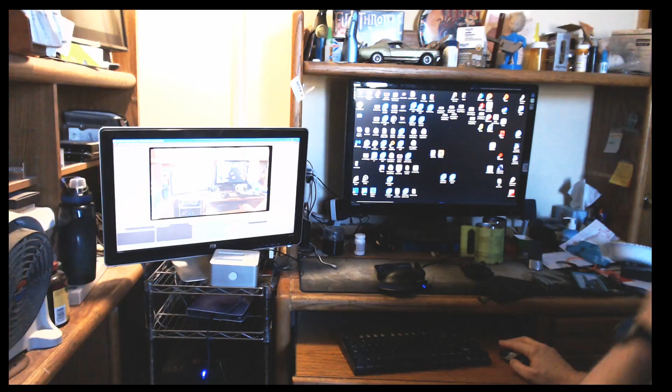So let's pop over to Fusion and get this thing finished and printed. Here's where we left off last time. This is our final, almost, piece. All we have to do is put our last little embellishments on it.

I want a hole, in fact two holes here. The first hole is just kind of a save-some-filament type of hole, and the second is going to be a hole right through here in case we want to put a piece of paracord on it and hang it. Those are both features of the original one, the green one I'm drinking my coffee out of, designed by Commando Design, on Thingiverse.

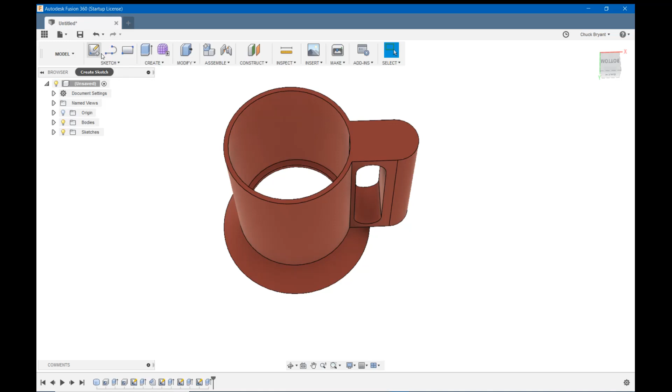So let's get that done. We're going to create a sketch on this top surface here. First, let's put our line in so we can center our holes. We'll hit L for line and draw a line down here. I don't care what length it is, just that it's 0 degrees.

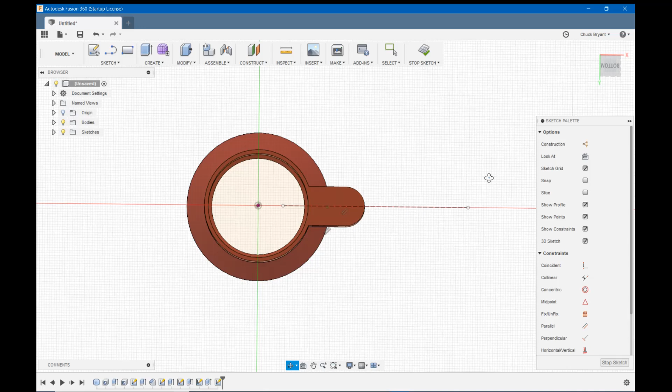I'll click to set it in place, hit escape to get rid of my line tool, then click it to highlight it. I'll click coincident over here in my constraints and lock it into the center. Now I'll click it again to highlight it and click construction. Now it turns into a dotted line, meaning it's just there to help me draw things, not part of our geometry or creation.

So we'll hit C for circle and put our circle down here. C gives you a center diameter circle. Putting it on my line, you'll see it will lock in. I think I want this hole to be 12 millimeters. Enter, enter. Now you'll notice I can move it around, but I can't come off of that line with it, only back and forth.

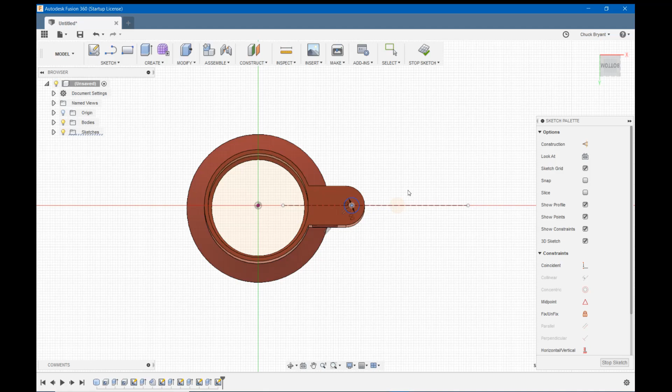I'm going to put it, I don't know, about there. I could dimension it, to be honest, but I don't care enough. I'm sorry, I shouldn't say that, but I don't. I only care about where it is, not exactly.

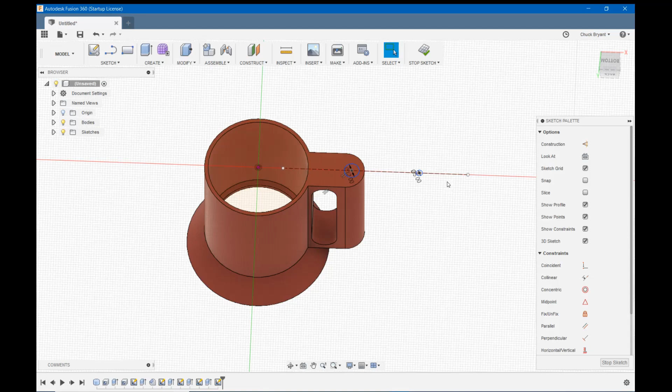So I'm going to make another circle, lock it in here. This one wants to be 5 millimeters, I'm just throwing numbers out here. Let's zoom in and move this. I want to put this circle almost directly over the center of our arch - yeah, that's pretty darn close. I'm happy with those, not going to get any fancier than that.

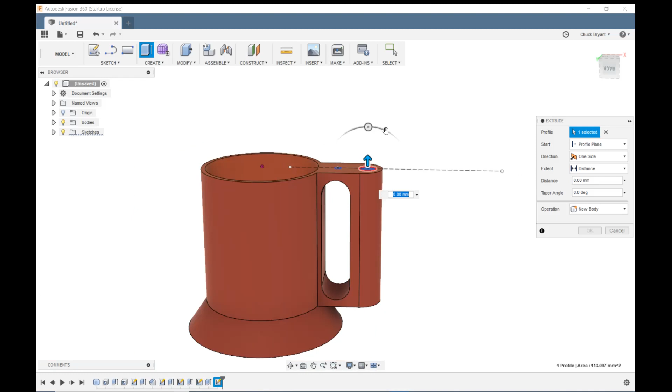So I'm going to hit E to extrude. I'll click on this one, and this one's going to go all the way. I'll just drag it down about there and say okay, it's going to be a cut. I could tell it to go all the way - if I change distance to all, I could change this dimension up and down and that hole would always go all the way through. If I told it an exact dimension and then changed this, I'd have a hole that didn't go all the way through. But I'm not going to change this, so I just drag it down and say okay.

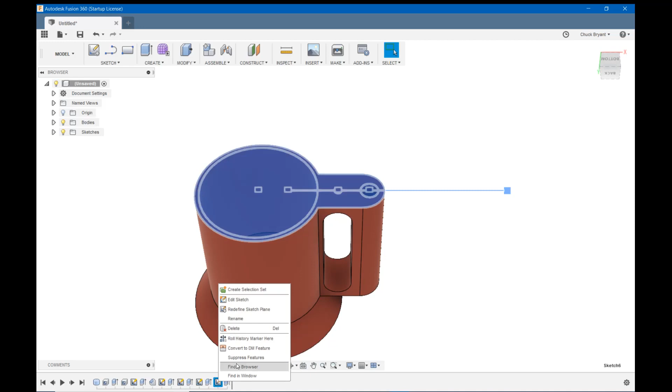So now I need to come back to my sketch. I'll right click and say edit sketch. Now I'll hit E to extrude again, click my little hole there, and just drag it down about there and say okay. And those are my two holes - one goes all the way through, one only goes through into my arch here.

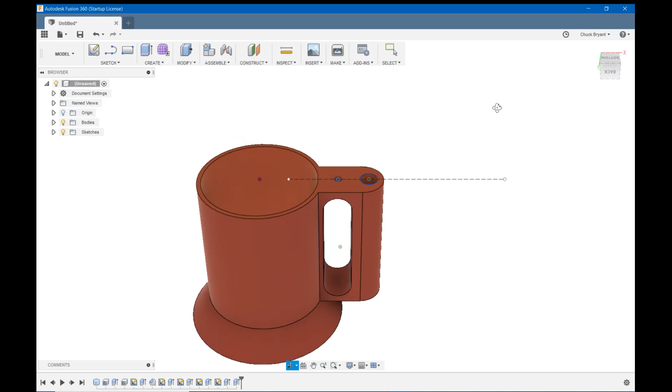Let's turn the sketch with that line off because I don't need that. So we're basically done, except I want to put a few finishing touches on it. Then we'll move it over to Cura, see how long it takes to print. I'll print one, we'll come back, and I'll show it to you, and we'll see if it works.

So first thing I want to do is modify and create a fillet. I want to go to this bottom edge right here, and put, let's try 5. 5's way too big, way too big. How about 3? Yeah, better. Let's try 2.

I like 2, okay. Now I don't need a chamfer or a fillet here because if this was a square bottom cup I would, but this cup has a large radius on the bottom, so I don't need anything there. This outer one here, I'm going to put a little bit of a fillet there. It probably doesn't need it, I just like it.

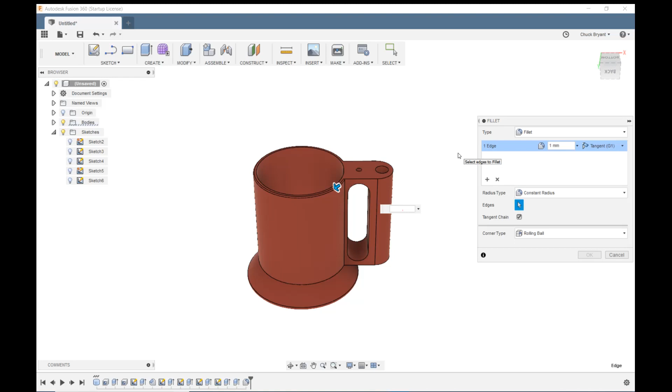Let's try 1 millimeter. One might be more than what I want. Let's try 0.5. That might not even be noticeable on it, but it might take the sharp edge off it, which is all I care about.

So now we're going to fillet the rest of it. Modify and fillet. Let's zoom in a little bit and start with that one there. If I haven't mentioned it in this video, to zoom in and out you roll the mouse wheel. To rotate, you hold the right mouse button down. And to move back and forth or up and down, you hold the middle mouse button down. That's how you move things around in 3D.

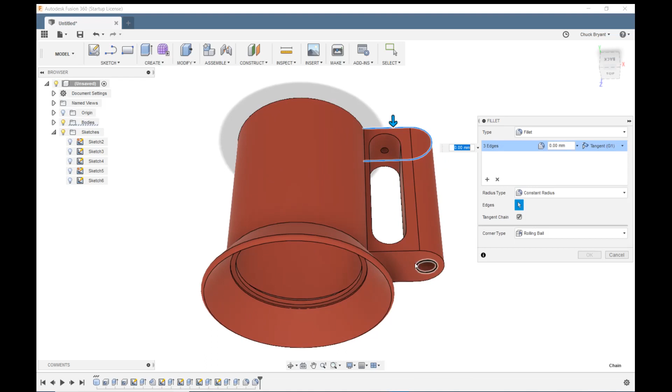So I'm going to fillet that one, the same one down here, this line, and this line. And I believe that's all I really want to do. I don't really think I need to do those holes. I could, but it's kind of overkill. Let's not overdo it here.

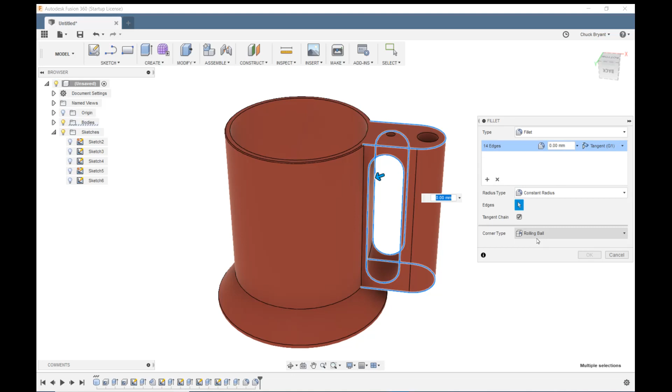Let's try 3 millimeters. I know 5 is going to be too much. I think 3 is a little too much too. It's running this one into this one, and it might leave me a sharp edge there.

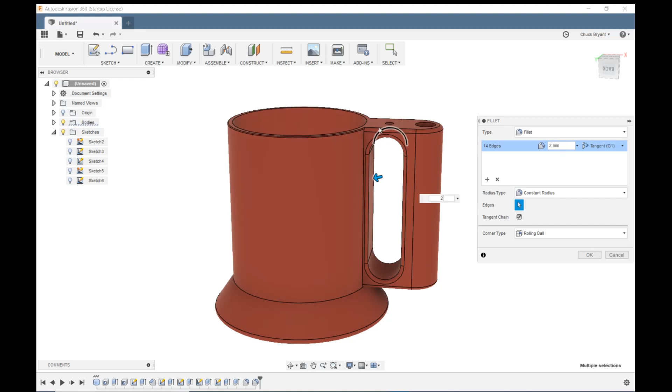So let's go to 2. I like 2 because it doesn't run those two fillets together. Right here, it could run that fillet with that upper fillet and give me a sharp edge. This does not, so let's go with it. Enter.

And there you have it. I think we're completely done. There's our finish, so let's save it. Come up here to the save button, which looks like a floppy disk. If you're old enough to remember what a floppy disk is, I am. For better or for worse, we're going to click save.

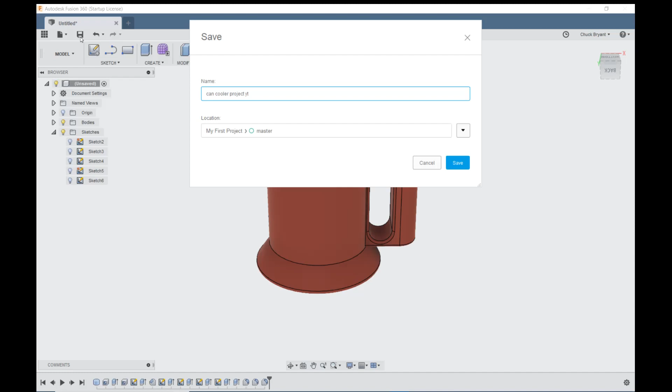We're going to give it a name. Let's call it Can Cooler Project, and put in YT just so I know it was something I made for YouTube. We'll click save, and as soon as it changes the name and saves to the cloud...

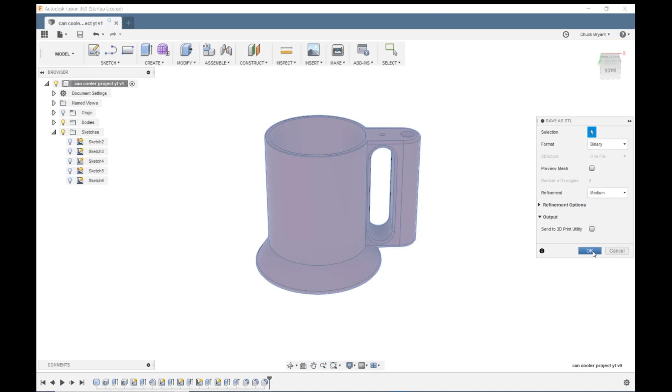I'm going to right click its name over here and say save as STL. Make sure send to 3D print utility is not checked unless you want the program to send it directly to Cura, which I do not, so I'm going to say okay. I tried that and it did some things I didn't like. It was long enough ago that I don't even remember what it was.

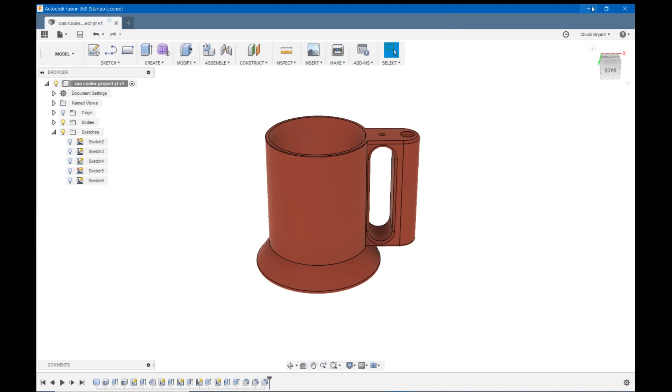I have a couple others here I messed around with that I didn't like, or I hosed the video up. So I'm going to say save, and I'm going to minimize Fusion. Now I'm going to find that one, Can Cooler Project YT, right here, and double click it.

While Cura is opening, let me talk about what I'm going to print it in. I have been using PETG for my last couple of projects, but I do not think I'm going to use PETG here. I only have it in black, and I don't want black for something I'm going to take outside. It absorbs way too much heat, and it's too easy for me to lose.

So I'm going to print this in some bright color of PLA. I have taken my PLA coffee mug shell out in the bright Arizona sun, left it sitting in my car in the summer, and I have not had a bit of problems with it. So we're going to do this in PLA. Now you notice when Cura popped up, it's already oriented the way I want it printed.

This part does not require any supports. And I'm going to use my Chuck PLA Best Top Layer Cura profile. It has a number of features which I have found that I really like.

Other people have tried it and didn't like it, like the 0.5 line width, but that has worked out really well for me. It was recommended to me by one of the smart guys over at the Cura forums to solve a problem with gaps around top flat surfaces around holes, and it cured it completely for me. Honestly, it's worked great for everything, so I'm going with it.

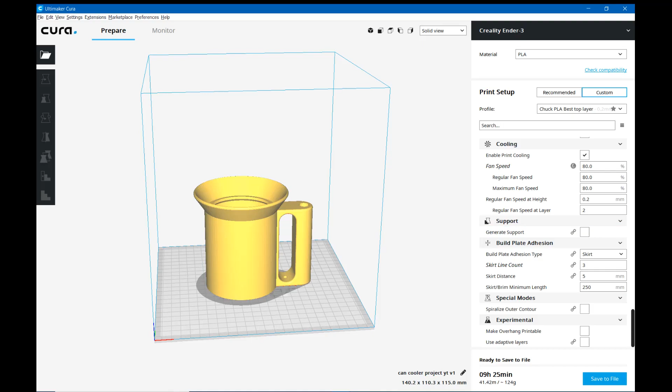We have been running about 10 minutes now, so that sounds pretty good to me. I am going to go ahead and save this and print this, and we're going to come back in the next video. And you know what, it's only 10 minutes, I might add it into this one. So hang with me, and I will get this printed, and I will be back in 9 hours and 25 minutes. Well, no, I'll be back right away as far as you're concerned, but 9 hours and 25 minutes will have passed.

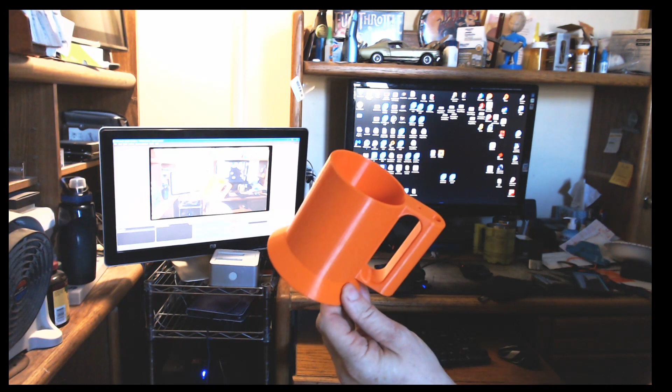Welcome back, everybody. So there it is. We got this off the Ender 3. I printed this on my oldest Ender 3. I actually went to bed while this was printing, even though I was kind of concerned that there wasn't going to be enough filament on the spool.

And it ran out with about an inch of filament sticking out of the feed side of the extruder, if you can believe that, about an inch before it goes into the feed gears. Couldn't believe that, I don't normally luck out to that degree. But here is our nice anti-spit, anti-tip over, anti-rock bottom. There is our ledge, and you can't see it, but it's got a nice 45 on it. It printed beautifully.

And our handle came out nice and smooth, nice and comfortable to hold, no rough spots. Our top and bottom, I mean, I couldn't be happier with how this turned out. The Cura setting to hide the Z-seam really works out super well for me. It really turned out nice.

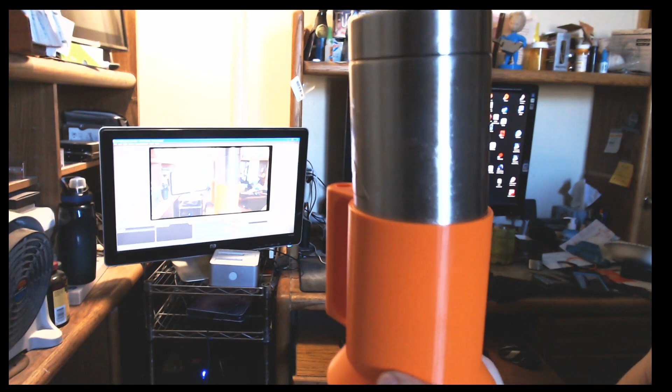So the only thing we got to do is shove our can cooler in it, and let's see how it works. And it took me a while to get that stupid sticker off of the thing. Holy cow, I thought I shouldn't have to use 17 different chemicals to get a sticker off of something. Come on, Walmart, you can do better than that. Talk to those people over there.

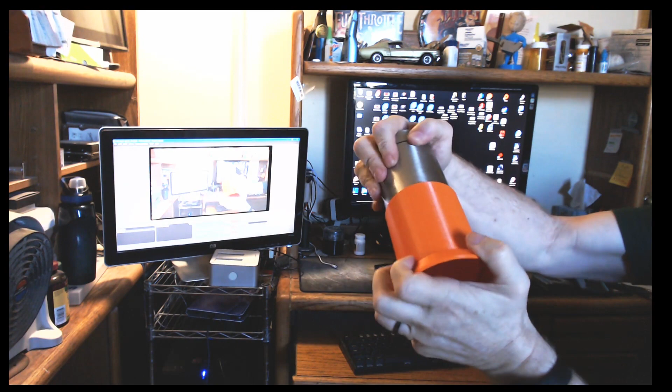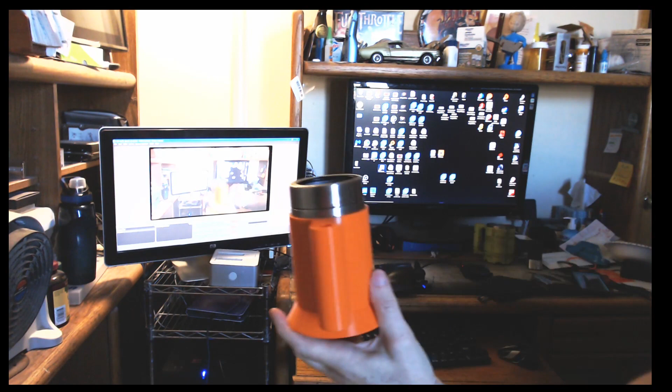Anyway, I put a little silicone lubricant on it to help it slide down in. And there we go, how's that? And there we have it, it is done. Now you have your insulated stainless steel can cooler. You have your nice anti-tip, anti-rock, and a nice, easy, smooth handle to hang on to. Does it get any better than that? Hey, I don't think so.

Having Fusion, knowing how to use it, and a 3D printer is great. All of this stuff that either doesn't exist, or you'd have to carve out of a chunk of wood or a chunk of aluminum, and take hours to do. You know what, turn the 3D printer on, go to bed, wake up the next morning, and you have a part sitting there ready and waiting for you. I love it, I honestly, absolutely love it.